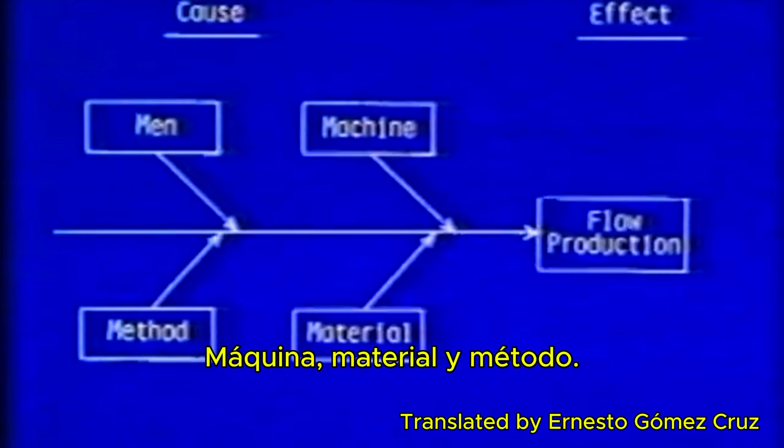Even though the list of hurdles is long, it's important for each of us to believe that there is always a way to progress further. Instead of thinking of these hurdles as insurmountable obstacles, we need to think positively in terms of flow production being possible. Parts can come on time. Machines can run as required. We can produce quality products. And we can solve problems as they arise. In other words, man, machine, material, and method, the 4 major elements of production, are working together to achieve flow production.

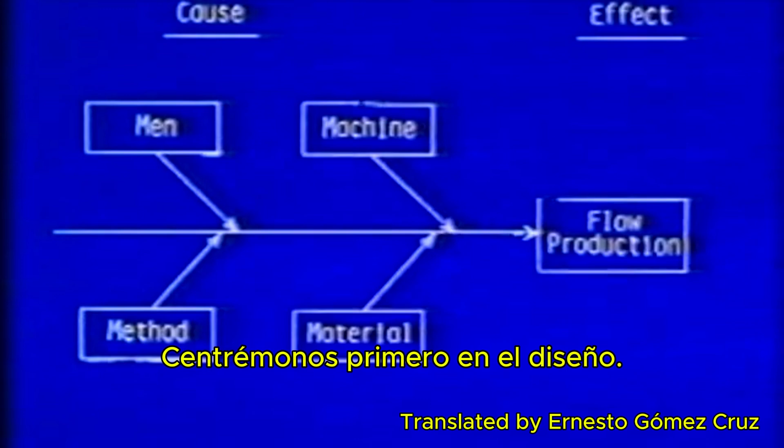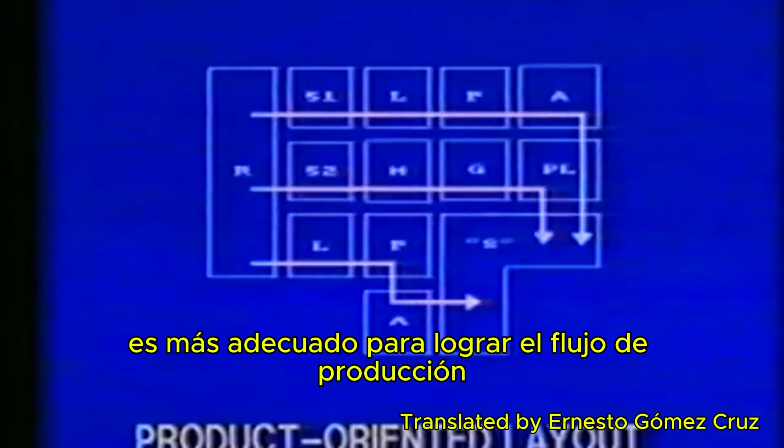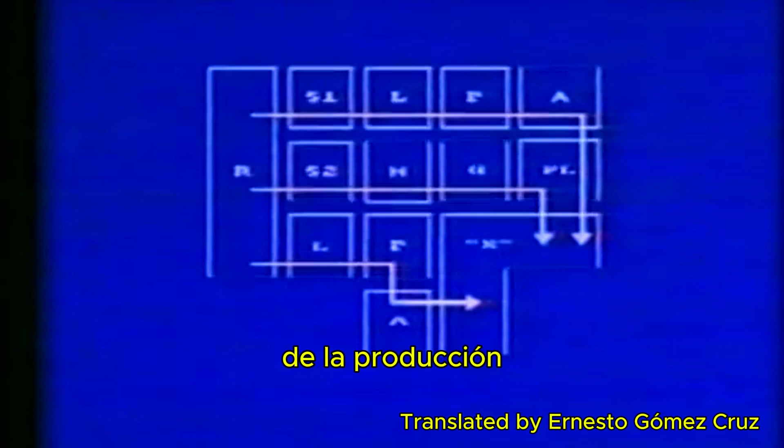In discussing the many problems to overcome in developing flow production, let us first focus on layout. When describing layouts, there are 2 major types. A process-oriented layout is one where machines are located according to their function, whereas a product-oriented layout is one where machines are laid out according to the flow of materials. Not surprisingly, a product-oriented layout is much more suitable for achieving flow production. As we develop the product-oriented layout, the material transfer between different processes becomes much easier. Also, production lead times and inventories accumulated between the processes will be reduced significantly.

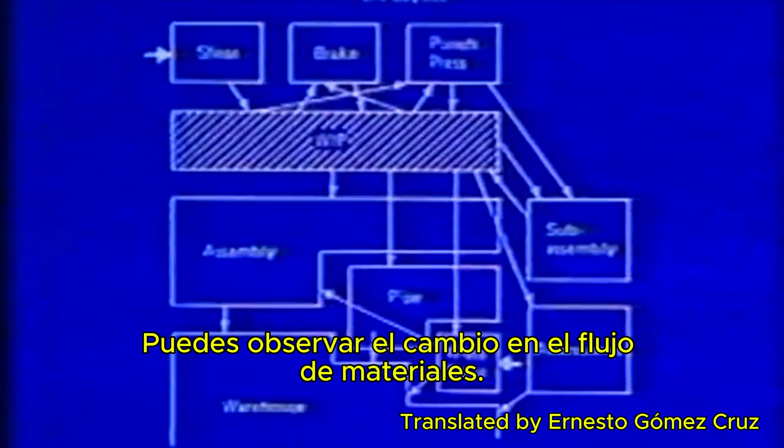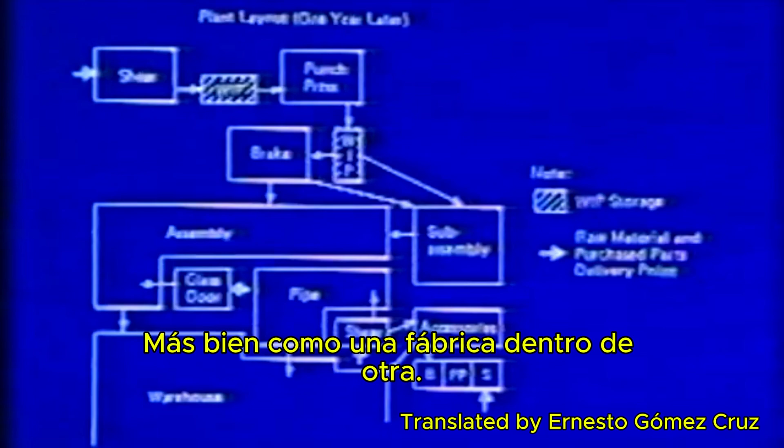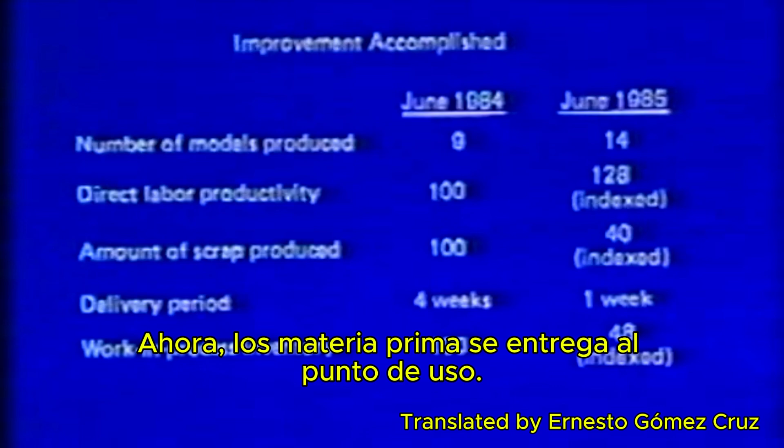Take the case of Fireplace Manufacturers Incorporated. You can see the change in material flow. Before, the flow was very complex. Now there are 4 major flows, one for fireplaces, one for glass doors, one for pipes, and one for accessories. Each is dedicated by product line, more like a factory within a factory. Because of its product focus, this is sometimes referred to as a focus factory arrangement. Now, raw materials are delivered to the point of use, and material flow is greatly simplified. The new layout is easier to manage, and the benefits achieved were substantial.

It seems like what you have just explained to me was simply to tie different operations together based on the material flow. Am I right? Yes. Well then, what's so difficult about doing it? It seems so natural. You're right, but often we put the same type of machines together rather than think about the flow of material. Also, we may simply put machines where there is open space. We may even put or buy the wrong kind of machines. What do you mean by that?

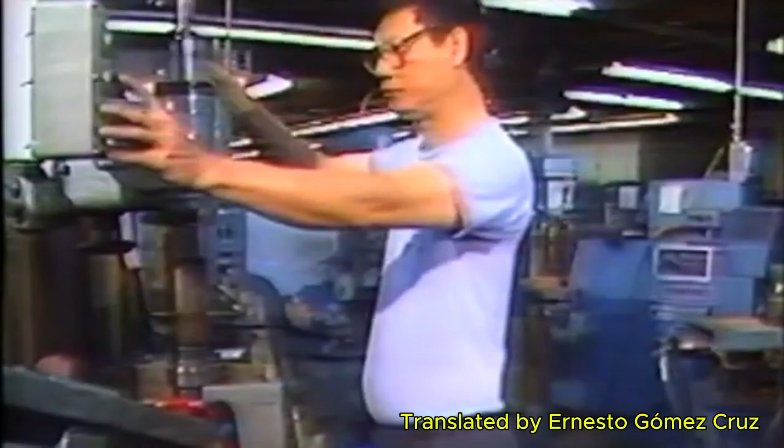Now the effect of this is that, first of all, we've reduced all the travel time throughout the whole shop. We can get one part flowing through each machine, going from start to finish in a very, very short time. And in fact, we compressed the lead time from our 10 to 15 days down to, in effect, 3 minutes. In addition to the lead time, reject rate went down from 20% to 2%, and the operator's work time per part was cut in half.

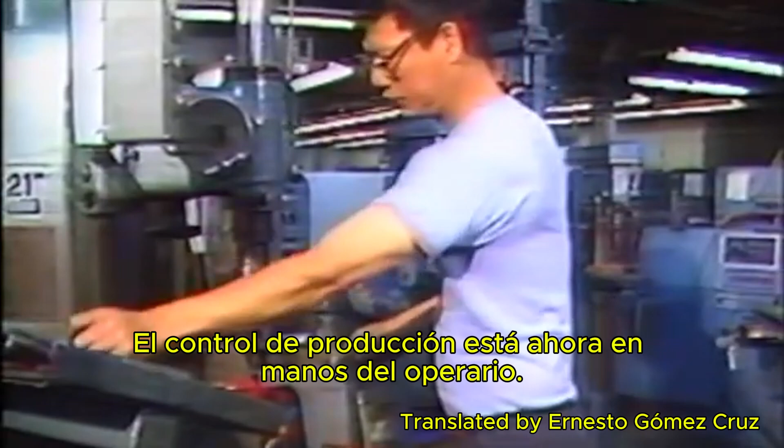Plus, since a part goes through the whole cell in only 3 minutes, there is no need for a computer system to track it. Production control is now in the hands of the operator. In this example, 4 operations were previously run independently of each other. When all 4 operations were combined, the carts full of inventories going between these operations were eliminated. This arrangement also pointed out which operations needed further improvement.

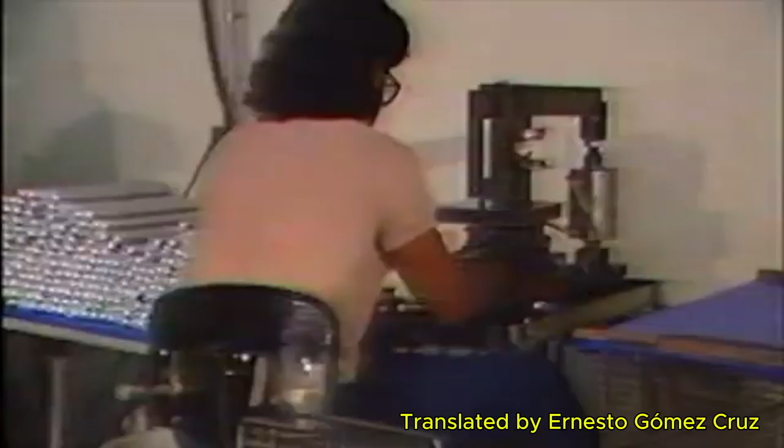For example, there is still sizable inventory buildup between each operation. The parts are not yet moving through like a stream, indicating further improvement potential, not a problem or an impasse. Also, in the future, these 4 operations may be tied to the assembly line, thus furthering the integration of material flow. This is an example of semiconductor fabrication.

The need for this third clean room was eliminated by simply rearranging the machines, integrating the 3 rooms into 2, thus helping smooth material flow. The results have been quite dramatic. The racks are empty, the material is moving, the amount of material we needed in the line has been reduced by a factor of 2. This reduction has allowed us to increase our capacity to have an empty room, a room where we could bring in new equipment for other new things that we want to do in our technology.

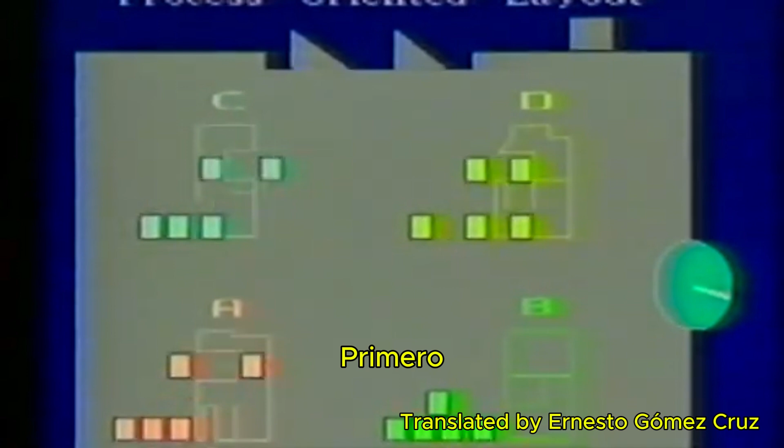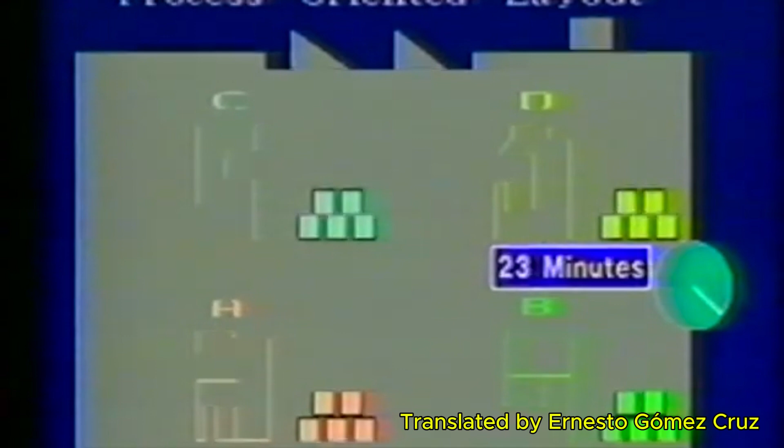This example will illustrate the benefits of a product-oriented layout. First, this represents the typical process-oriented layout. Here, completing the first batch of 5 units takes a fair amount of time. Our next example represents the product-oriented layout. Now, to complete the same batch of 5 units takes much less time, and work in process is substantially reduced when compared to the previous layout. This is the ideal. When this is accomplished, this is called one-piece flow production.

The U-shaped line, or U-shaped cell as it may be called, has unique features which help to achieve this one-piece flow production. A U-shaped line can achieve improved communication within the line, simpler flow and easier production control, ease in combining work steps, more flexibility for changing production volume simply by changing the number of people in the line, and better teamwork and increased ownership for operators in achieving common goals. Now, let's hear from some people who were involved in converting to these new layouts.

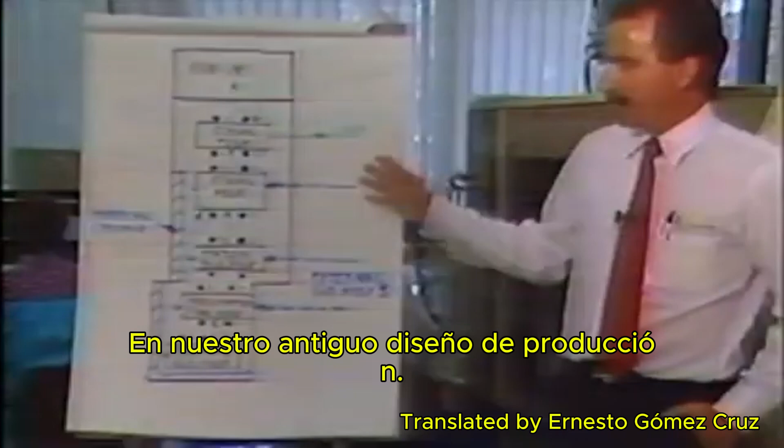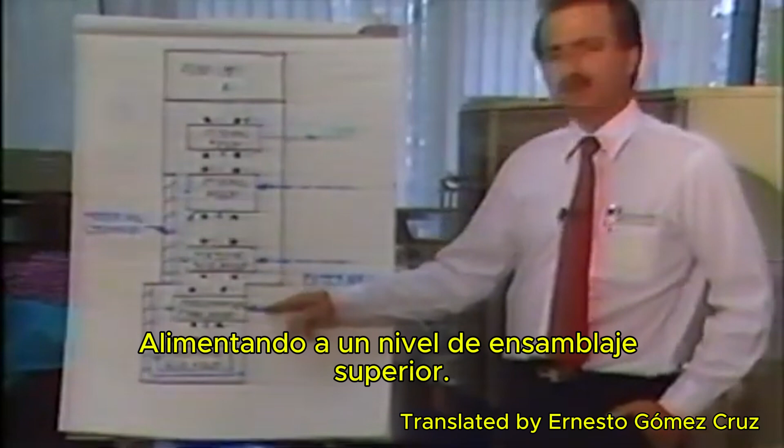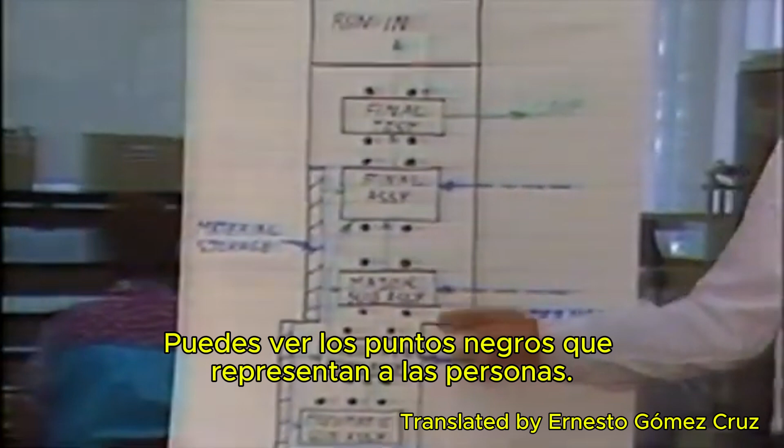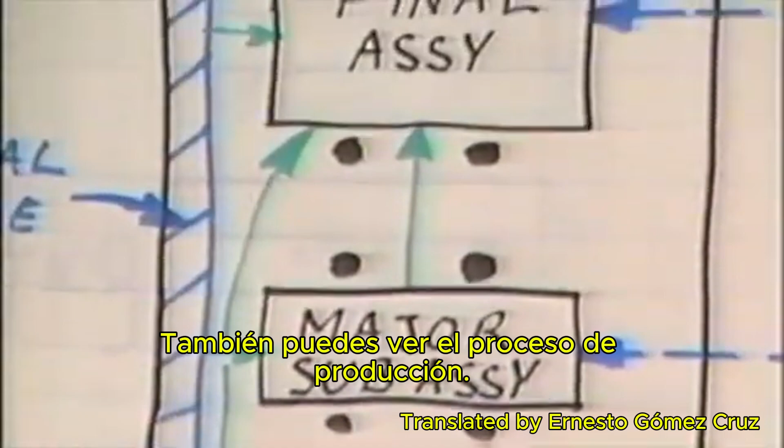In our old production layout, you can see we were organized along production process cells. We had a sub-assembly area feeding into a higher level of assembly, feeding into a higher level of assembly, and so on until the product made it through the production process. In this chart, you can see the black dots representing people and how they were placed. And there were a great many barriers to the movement of materials and the communications just because of the layout. You can also see the production process with these green arrows as being fairly awkward and not as smooth as it could have been. To contrast that, we can look at our current layout.

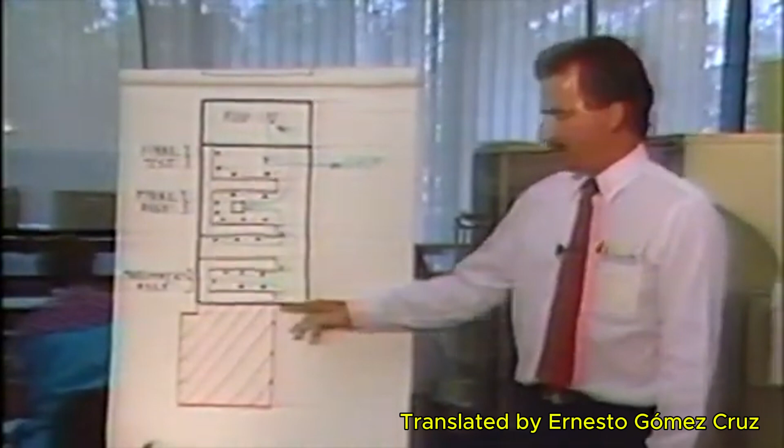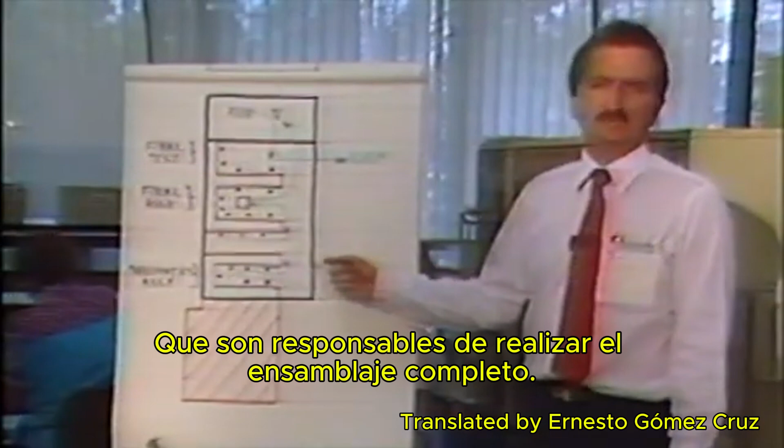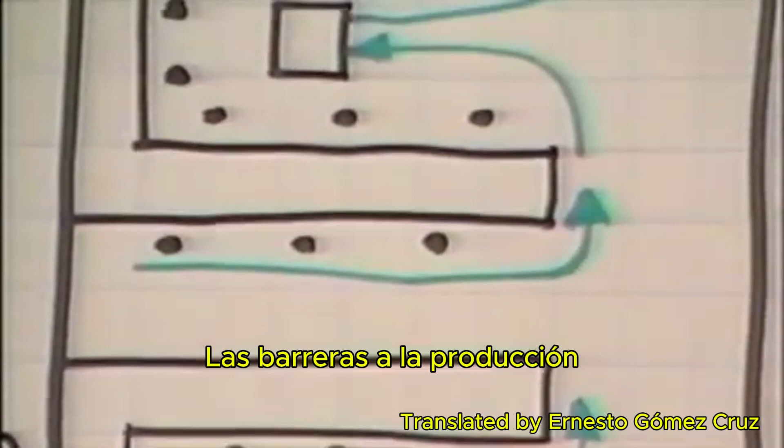In this case, what you see is we've eliminated roughly 25% of our production operation floor space and introduced U-shaped production lines that are responsible to do the complete assembly. You can see the black dots again representing people on the production line, and the production flow has been greatly streamlined. The barriers to production that existed in the old layout no longer exist.

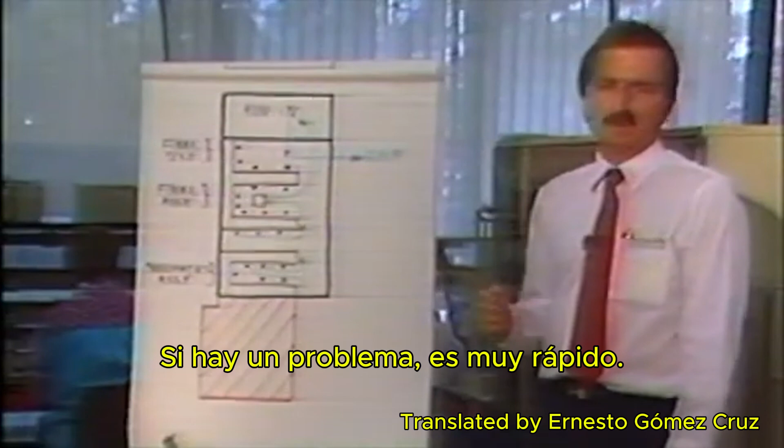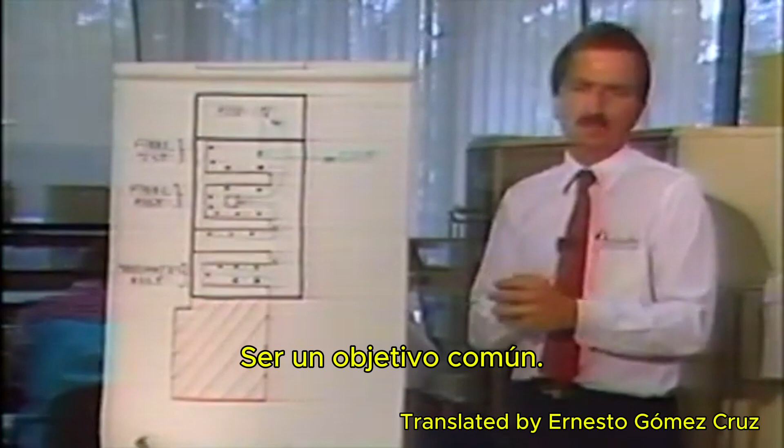There's a great deal of openness in the work cells. Information is easily gathered and shared amongst individuals. The feedback of problems from the person at the end of the line to the beginning of the line, if there is a problem, is very fast. And also, there's a great deal of personal identification that happens within this team of people. They're able to recognize the goal at the end being a common goal, and they can share and help each other a great deal. Where we've come from is quite an improvement.

In the old days, we still managed to produce the units, but we always had the traditional end-of-the-month crunch, where we were scheduled to produce a certain number of units, and at the end of the month we had produced them, but it was in the last 3 days of the month. And we had a lot of confusion on the line, to be honest. As I stated before, product flow wasn't quite organized. People were building to standard, yet they were not being consumed that way.

And what we've got now is a very precise movement, and it eliminates the end-of-the-month crunch specifically. It's created very linear flow throughout the organization on through shipping, which in turn does support the customer.

Our very first cell we produced was a cell that produced these little four-way valves for Newcon, and for 13 years the very best time we could assemble these in was 7 minutes. After our first cell was developed, we produced this valve in 3.5 minutes, which cut that assembly time in half. Not only do you save time and energy in building the product, but you end up with a better product. You end up with a product that's brand new, that hasn't been in inventory, and is to the latest drawing.

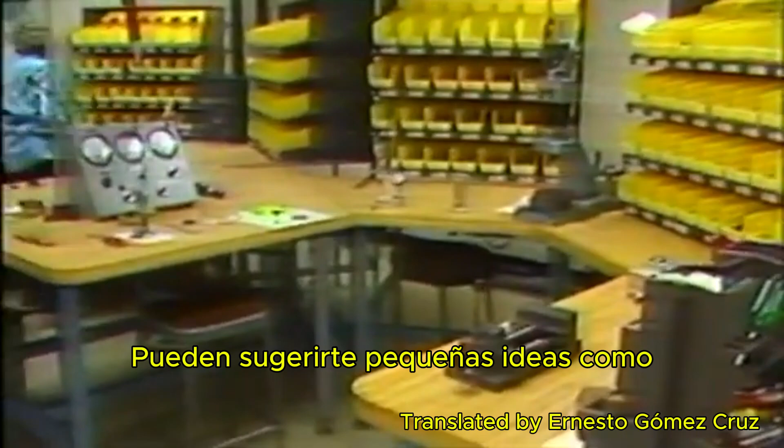It's important to remember that a cell is never finished. You can get it to a certain point, but there's always times for improvement. And most of those improvements are going to come through the people who are working the cell. They realize where their wasted movements are, where their movements are going, and they can tell you just little ideas like we need a tool here, or we need to move this bench a little bit to the left. What you should pay real close attention to when developing cells is the fine points of where the product should be set down, or little movements that you're doing that you feel are wasted.

We thought that it would be very good to start with a simple part. This is an idler gear that goes in our 5-speed transmission. The cell that we worked on is simply a cell that hobs these teeth, and then we do the tooth pointing in another operation, and then we do a finishing operation. Here's how this cell was laid out originally. This was typical, the inline kind of processing that we've had for many, many years here at BorgWarner.

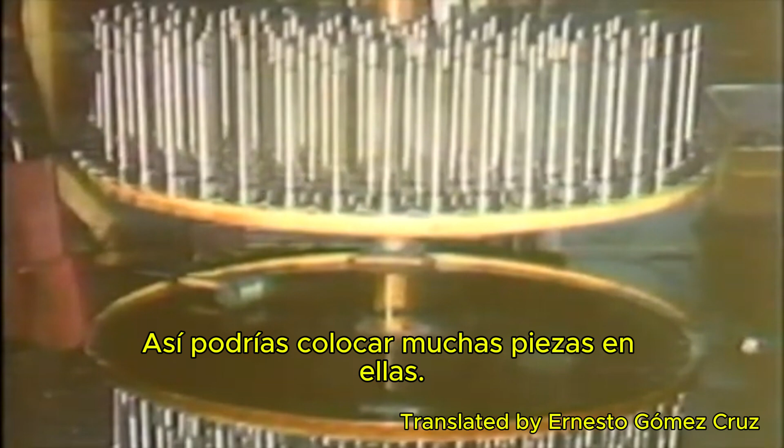On the plant layout, everywhere there was inventory, we've colored that in red. The incoming stock came in here in tote boxes, big 4-foot cube boxes. There was an operator stationed here that did the hobbing operation, and then he stored them on what we call lazy Susans. They're about 4 feet in diameter with several layers, so you could put a lot of parts on those. Then there was another operator stationed here that did the tooth pointing operation that I mentioned. And then again, that operator stored them on another lazy Susan.

The last cell then consisted of 2 of these shaving machines, and then we filled this conveyor full of conveyor racks and finally washed the parts and put them in another cargo container where they went to heat treat. Our U-shape concept was taking all that same equipment and arranging it in a U-shaped line.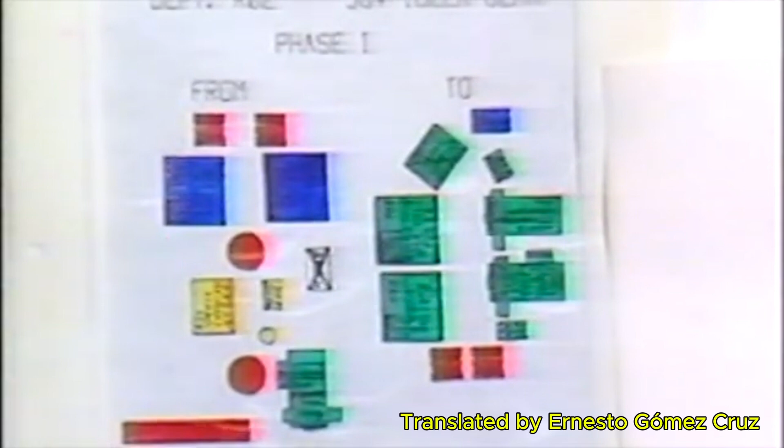Here we're showing the incoming stock right here, and an operator picks a part up and he hobs it, chamfers it, does a deburring operation, which was down here, and then shaves it, washes it, and puts it in an outgoing tote box. So you can see readily we had 3 operators working here, and we were able to run this cell with 2 operators, and they sort of chased each other around that cell in a merry-go-round fashion. By spending a few thousand dollars to change the machine locations, more than $100,000 a year was saved with productivity improvements.

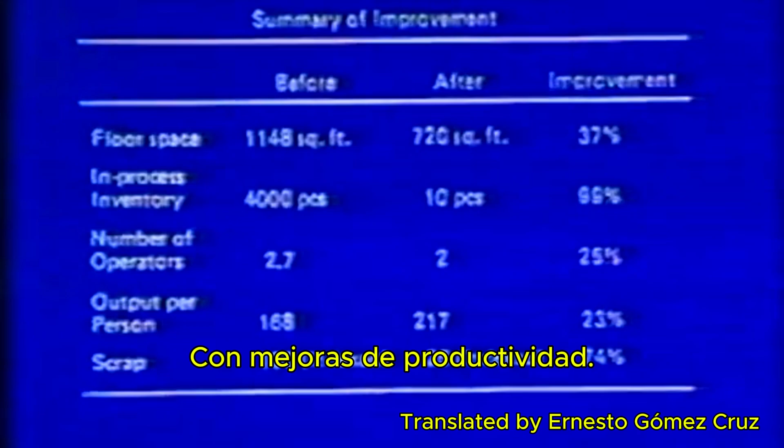So after we've gone through this department and completed our JIT, this is what it looks like. And you can see all the floor space that's been freed up for other product. And you see no conveyors or Lazy Susans. The lines are in JIT form, U-shaped, and we're very proud of what we've accomplished.

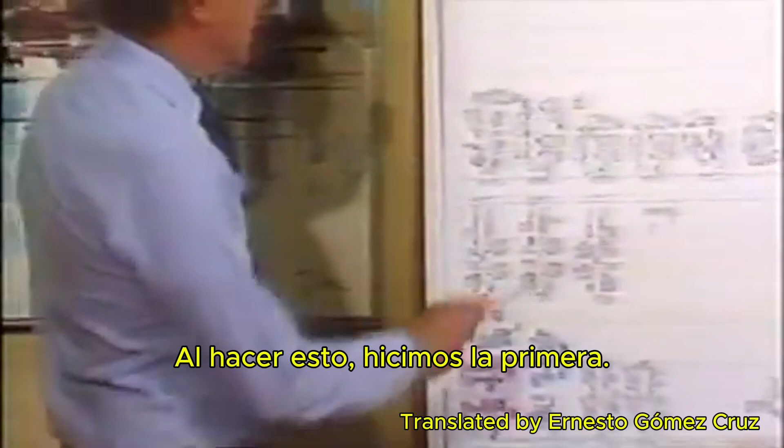But the key thing I think we learned in doing this is when we made the first U-shaped line that I described in detail, we did that without any operator involvement. It was just a matter of the industrial engineers went out there and over the weekend we rearranged the equipment, and when the people came in on Monday morning, here was a new operation for them to run. So there was a lot of resentment naturally from that.

So I think many times the engineers need to talk to us a little bit more about how we work, and then how they can plan the area better with their ideas and our ideas so that we can work together. It's just like, say, if I were going to go to your desk and rearrange all the papers on your desk or put the telephone down on the floor. It's just like someone coming in and doing that.

So I really believe that we can work better with the engineers and other planners if we would get together as in a team. So we went through a lot of pain and suffering in getting that cell back up to speed. So in the second cell that we arranged, we corrected that problem. We got all the people in a room, showed them what we intended to do, gave them a copy of the plant layout, and asked them if they wanted to change the layout, what would they recommend?

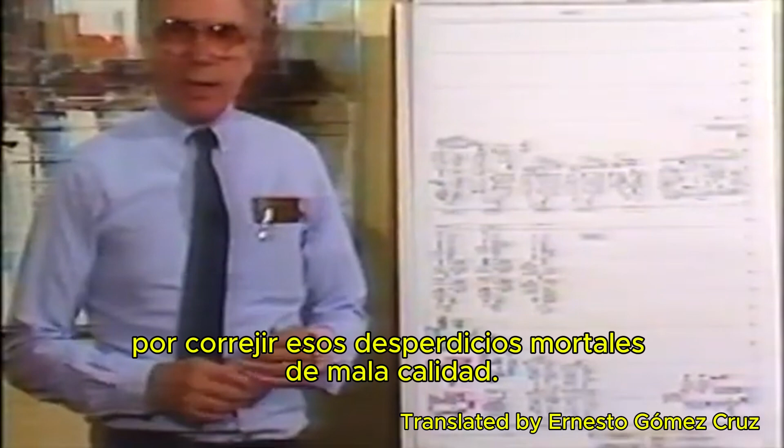Well, as it turned out, they didn't recommend anything, but the smoothness of the startup of that was the difference of day and night. So any other cells that we've done have been done with total operator involvement, and that's the key to making this thing work. People are anxious to correct those deadly wastes of bad quality, lots of inventory, and not utilizing their skills, but trying to utilize a machine.

So I guess if there was any recommendation I would make, it's to get operators involved if you're going to attain this kind of success. The key point is that in order to achieve the full benefits of a U-shaped line, we need to involve operators and enhance our overall skills.

The reason why I think it's a very good job and a good cycle is because we take a raw piece of stock and we run it from beginning to end. And while we're in the process, we're able to make any adjustments or any alterations that are necessary. Whereas before, maybe they may have one person doing the semi-finished cut and then sliding it on down the line, and maybe they wouldn't be able to catch anything that is wrong. I feel like with the JIT cell and the way it's set up, we'll be able to catch anything that goes wrong.

Since there is less inventory on the line, with more value-added work for the operator to do, the U-shaped line arrangement requires that operators develop a new set of skills. These skills include understanding a wider scope of their work, working on a broader range of machines or procedures, working as a team instead of as individuals, addressing problems quickly as they arise, and gaining ownership of running the line without much supervision.

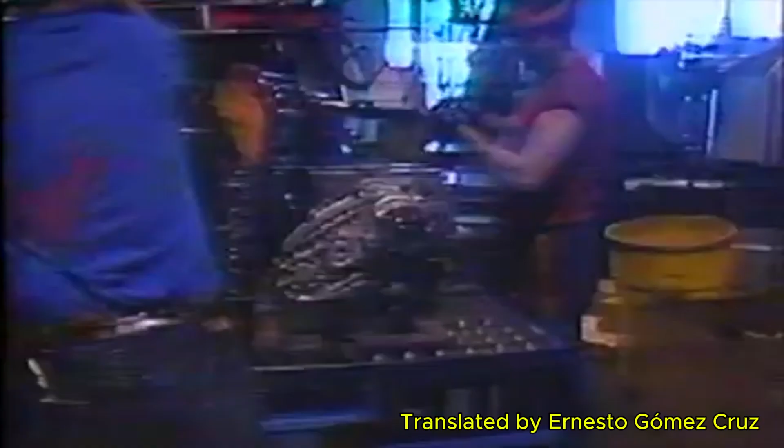Industrial engineers are not the only ones who can develop layouts. In this case, an operator developed a U-shaped assembly line with the flow production concept, where operators complete the assembly from start to finish. This resulted in a major reduction of inventory, floor space, and production lead time.

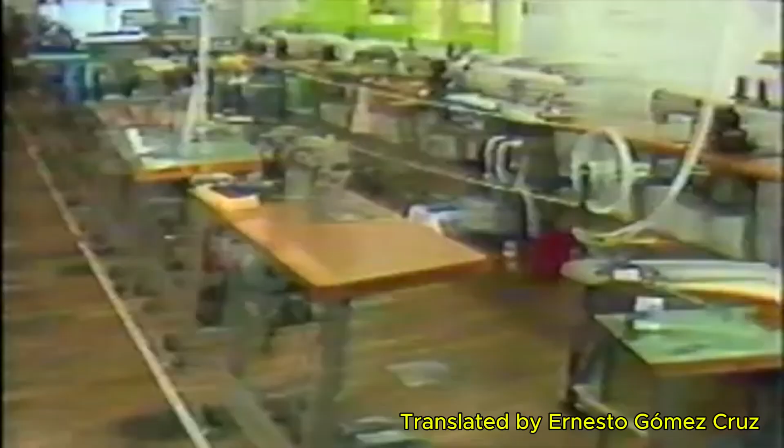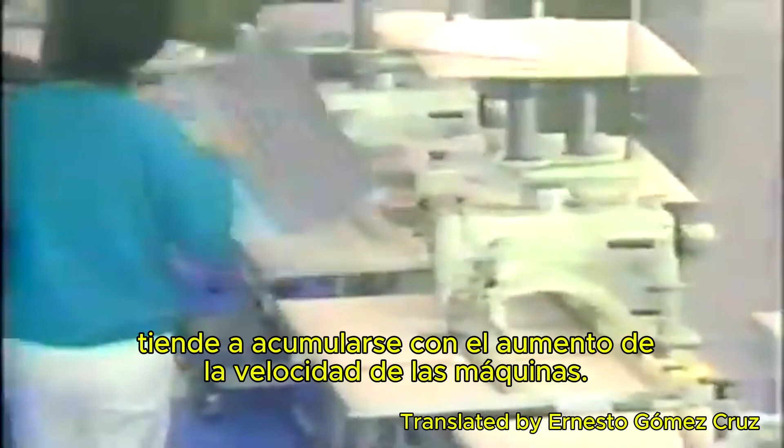In a conventional line, one operator is responsible for tending one machine. As a result, in-process inventory tends to pile up as machine speed increases and quality becomes more inconsistent. But in the line shown, the machines may be running slower than typical machine speeds, which is fine, as long as they meet the customer's need and have finished sewing the material prior to the operator's pick time. That is, the time from when the work is ready to when the operator returns from performing another task.

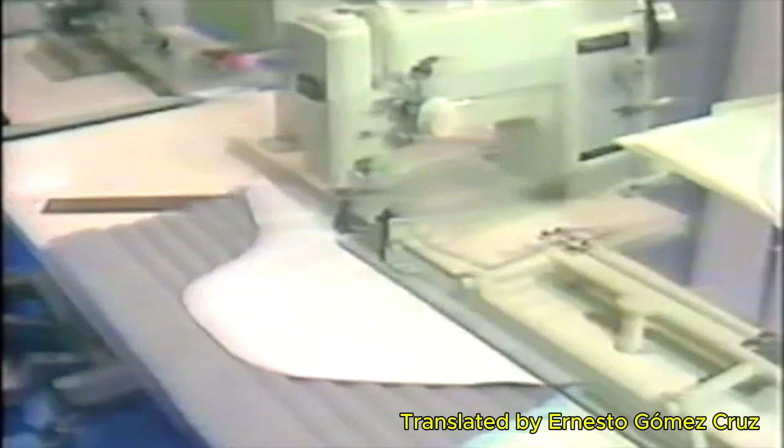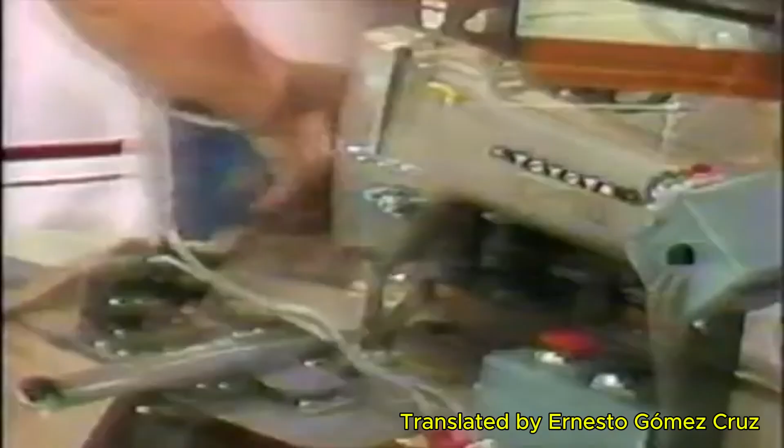In such situations, compact, unsophisticated, and relatively inexpensive machines are desirable, as they can often deliver high quality with fewer problems. Machines are modified for simplicity's sake, so that even a new employee can be put right into the line. Because the machines are so easy to handle, operator training on each machine is extremely quick. Thus, each operator quickly becomes multifunctional.

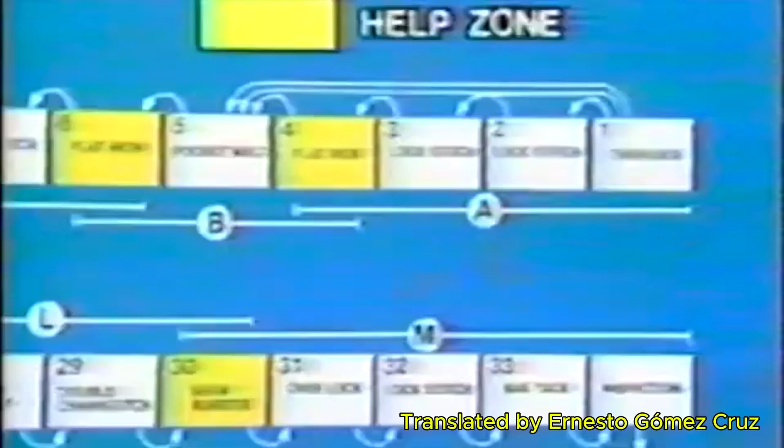In an integrated line such as this, any interruption, even as minor as changing a thread bobbin, will cause imbalances. To minimize this, a mutual help zone is provided, allowing the work to be passed on, sort of like the takeover zone in a relay race. This evens out the work performed by the operators and ensures smooth production flow.

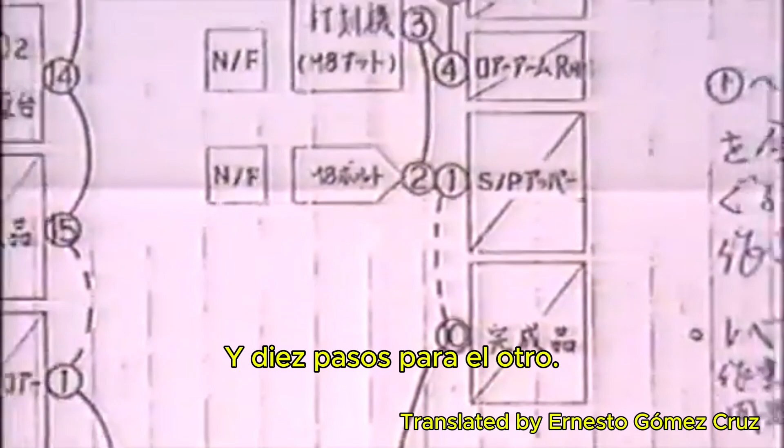This operator at the Japanese automobile manufacturer, Kanto Auto Works, is practicing one-piece flow production. The machines are laid out to accommodate this flow, allowing 2 different parts to be produced on this line. As this layout shows, the operator does 15 steps for one part and 10 steps for the other, for a total of 25 steps to complete the cycle. A good example of multi-process handling.

In this arrangement, there are 4 operators, each following the other. Because of this practice, as the market demands change, the number of operators can be changed accordingly. Notice the high level of housekeeping and workplace organization shown here. Notice also the simple mechanism used to eject the part, as well as the automatic parts transfer system. Not sophisticated or expensive, but they work.

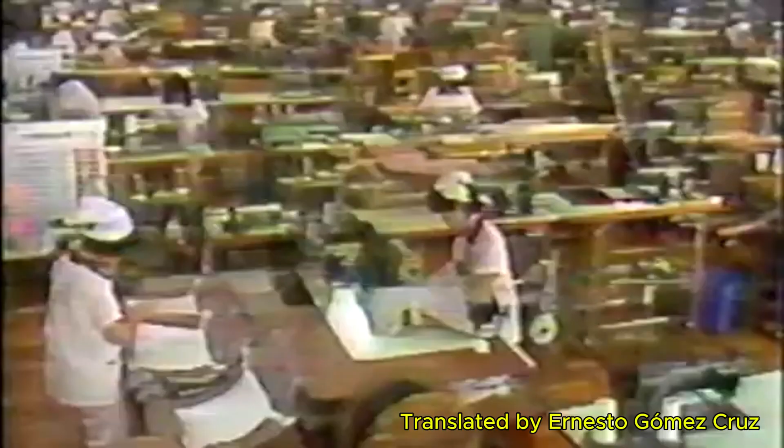So the benefits of this type of layout include increased productivity, increased flexibility to changes in market demands, increased quality, and increased operator morale. Again, however, people are the key to making this type of arrangement a real success. Only when we begin to understand the potential of these techniques and the importance of people involvement in implementing them will we be able to figure out how to use the freed up labor time.

The point being that our organization should allow its people to grow, to acquire more skills, and to share in the benefits through secure employment. Without the involvement of the people, we will never be able to achieve continuous improvement. I think I understand the potential of these improvements, but can you show me an example of this improvement process?

Generally speaking, you may be able to increase the productivity by 30 to 40% and reduce floor space also by 30 to, I would say, 40% or sometimes 50%, and significantly reduce the inventory while making major improvements in production lead time, often again from days or weeks to even minutes. These are major improvements. But what about people? I mean, those who are removed from their previous job.